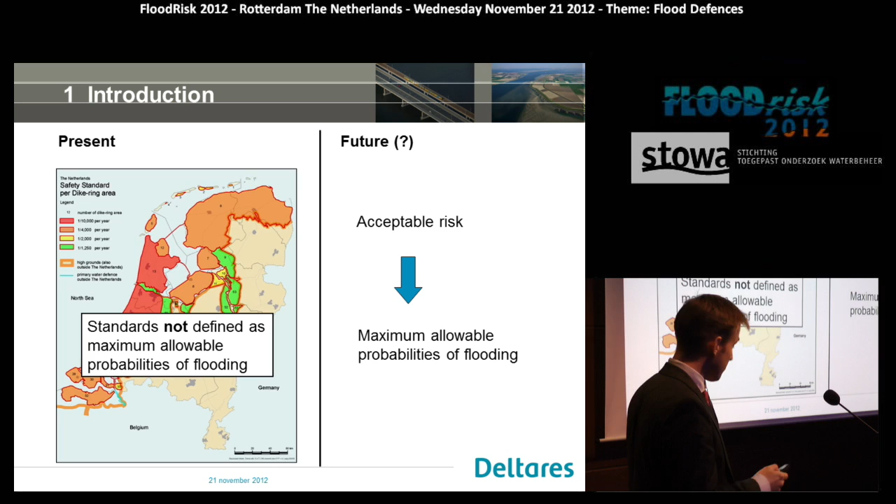Of course, if we move towards a new type of flood safety standard, we have to be able to evaluate or test our levees against these new types of safety standards. And that basically means that our current methods could no longer be used. And that's where the WTI 2017 project comes around the corner. Its objective is to make possible a statutory safety assessment, which has to be carried out every 6 years, based on maximum allowable probabilities of failure. And it says 2017 because by that time the project has to be finished.

Well, one way, of course, to evaluate whether we meet a certain maximum failure probability would be to carry out a probabilistic assessment, to calculate a failure probability. I see it moves a little, but in a probabilistic assessment, we're basically looking at the probability that load exceeds resistance. Because if the load exceeds the strength of the levee, it will fail. And for that, of course, we need probability distributions for load and strength variables.

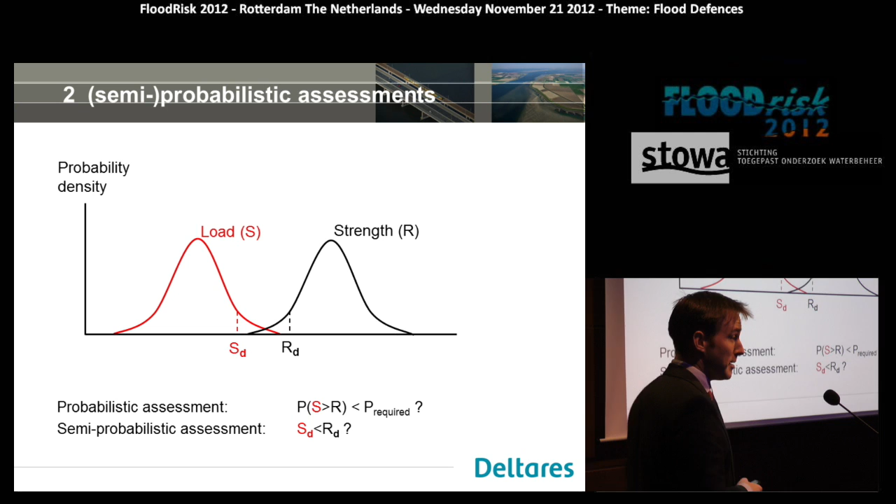Another way to assess whether a levee is sufficiently safe would be to carry out a semi-probabilistic assessment. And in a semi-probabilistic assessment, we use design values. And we're asking ourselves, is the design value of the load greater than the design value of strength? And a design value is a unique value out of an entire probability distribution. And for that reason, quite often engineers call those types of semi-probabilistic assessments deterministic assessments. Well, I think that terminology is slightly confusing because the exact same uncertainties play a role in probabilistic assessments.

Well, of course, the tricky part is how should we define such design values? And ultimately, basically, the idea is that these design values should be chosen in such a manner that if this criterion is fulfilled, the probability of failure is sufficiently low. And this procedure of deciding on design values is also called a calibration process, a calibration exercise.

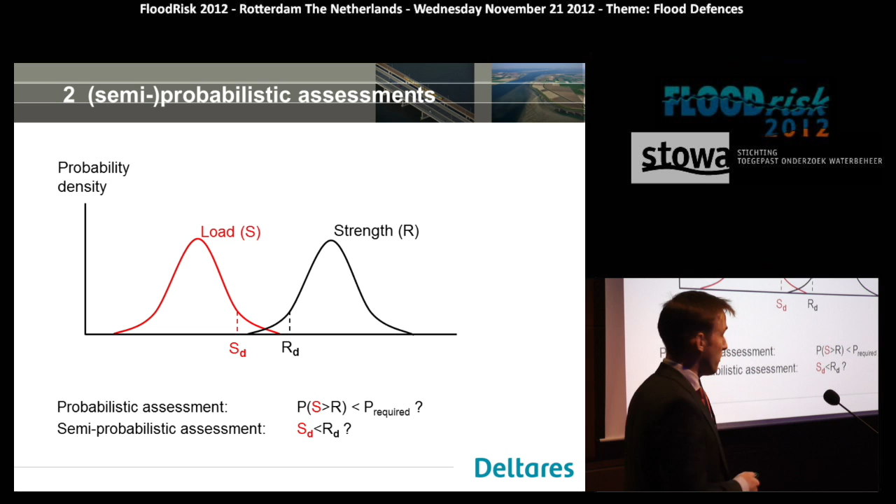And before I continue, I think it's useful to introduce you to some basic terminology. A design value is a representative value divided or multiplied with a safety factor. And a representative value is, for instance, a 5% quantile value, a 95% quantile value, or, for instance, a 1 in 10,000 year quantile value, such as a 1 in 10,000 year water level.

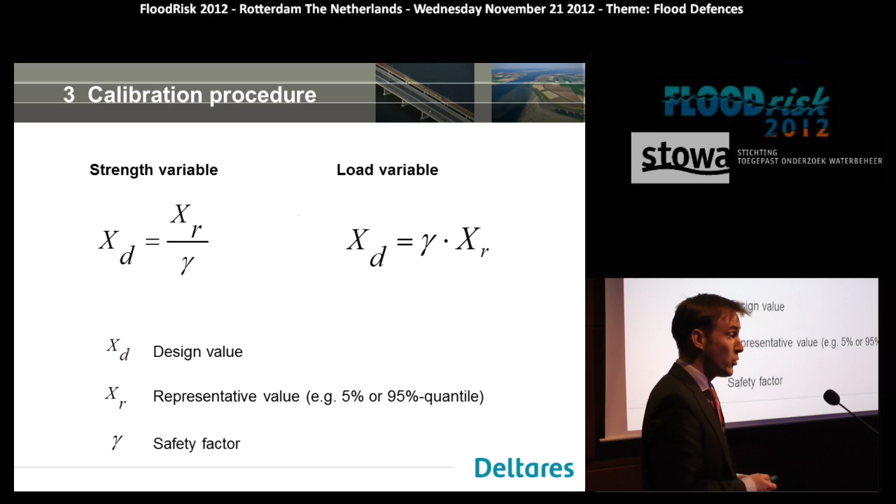Because of the role of safety factors, I will from now be mostly talking about the calibration of safety factors rather than calibrating design values.

The procedure that we developed within the context of the WTI project is first to establish a reliability requirement, then to establish a test set, which is basically a large number of levee cross-sections, then to modify the test set members according to the semi-probabilistic rule for a range of values of the safety factors that we chose to include in this rule.

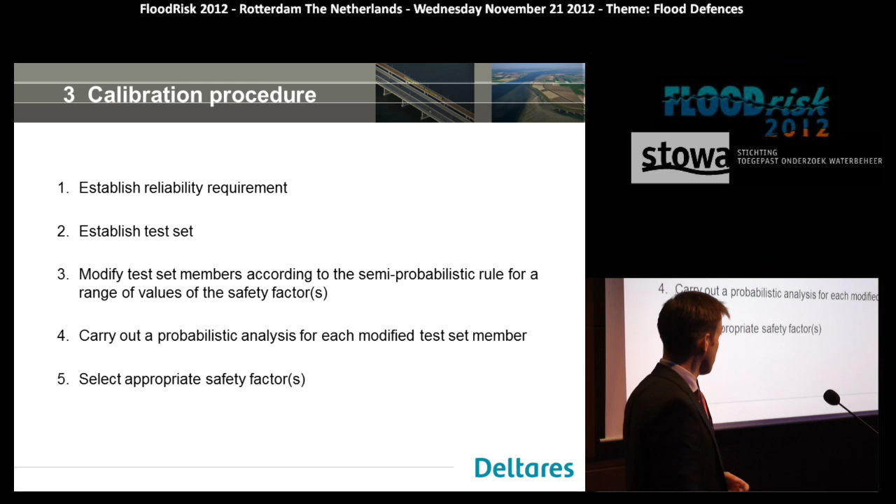So then we end up with a whole range of test set members that are modified. Then we're going to calculate a failure probability or a reliability index for each of these test set members. And then finally, we're going to select an appropriate safety factor based on the outcomes of all these calculations. And I will now explain to you what this actually means via a case study.

And our case study that I'll be presenting here concerns piping. This is a failure mechanism whereby internal erosion causes a pipe to grow underneath the levee. And progressive erosion could eventually lead to collapse of the levee.

The rule that we considered for describing the strength or the resistance of a levee against piping is the so-called Sellmeijer equation, which is used in the Netherlands in our statutory assessments. And what I would like to emphasize is that the results that I will be presenting here are the results of a preliminary calibration exercise that was mostly aimed at optimizing our methodology.

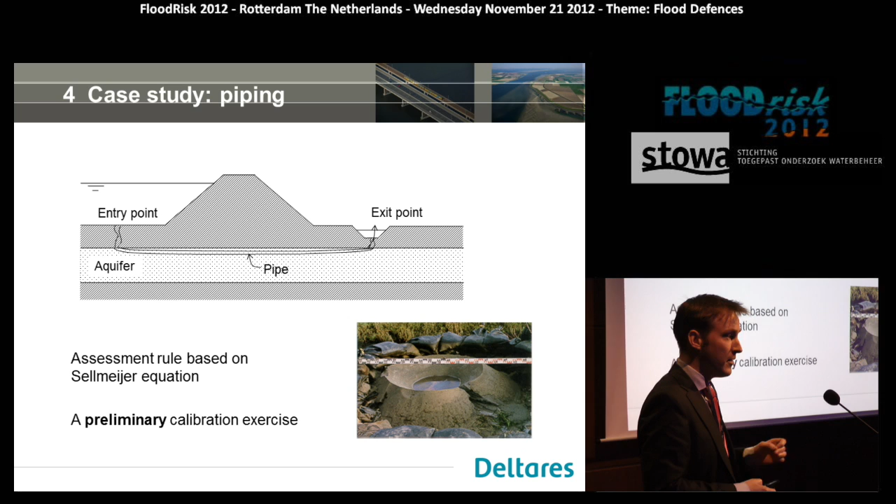Well, the first step is to establish a reliability requirement, which has to be specific for the failure mechanism under consideration. And there are many failure mechanisms that could trigger flooding, that could cause the failure of a levee. So what we do basically is distribute this maximum allowable probability of failure over the different failure mechanisms.

And in this preliminary exercise, we allocated a slot of 35% to piping. So if the maximum allowable failure probability is 1 in 10,000, then the reliability requirement for piping is 35% of 1 in 10,000.

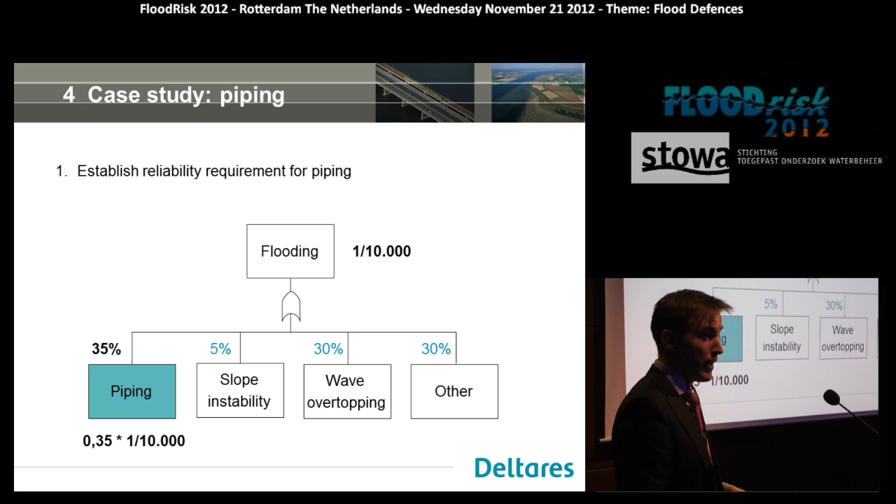A second step is to establish a test set, basically a whole bunch of cross-sections. And these were taken from the VNK2 project, which is a large-scale risk analysis for all Dutch major levee systems.

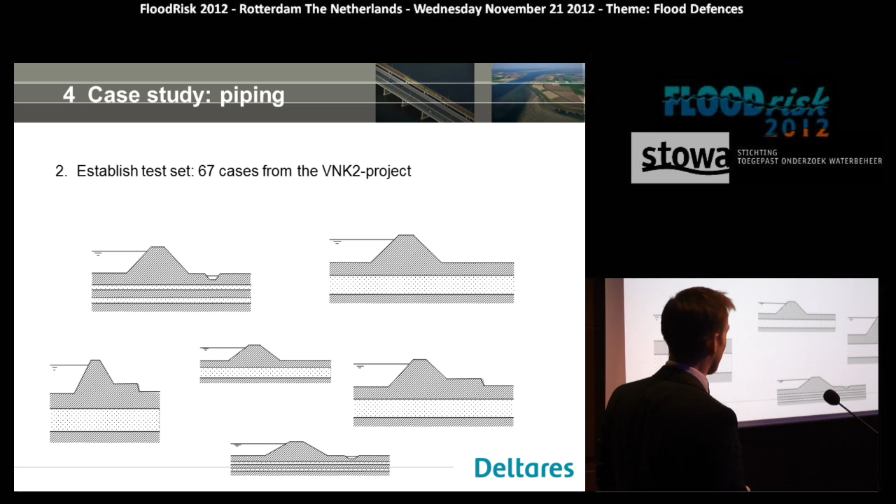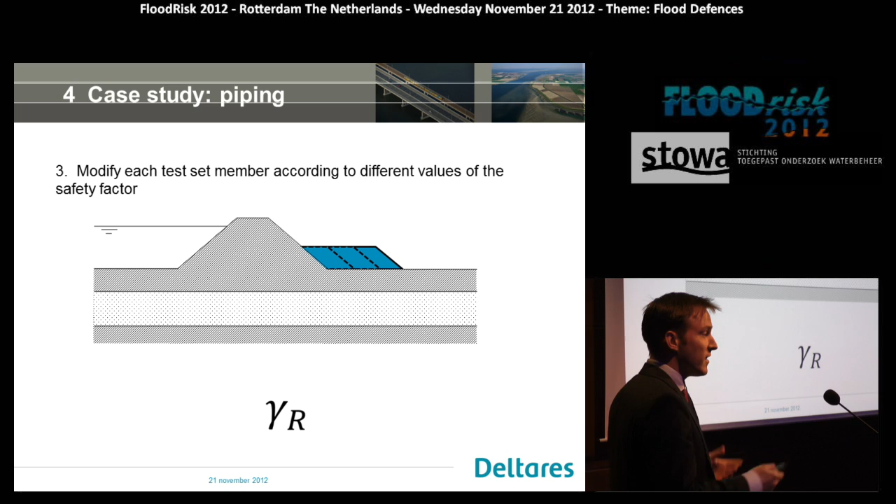A third step is to modify each test set member according to different values of the safety factor. So if we apply a higher safety factor, the levee has to be stronger. Its resistance against piping has to be greater. And this could, for instance, be done by adding a berm to increase the seepage length, the length of the seepage path. Well, the greater the safety factor, the greater this berm should be.

A fourth step is to calculate failure probabilities or reliability indices for these different test set members. And what you will see is that the higher the safety factor, the higher the reliability index will be.

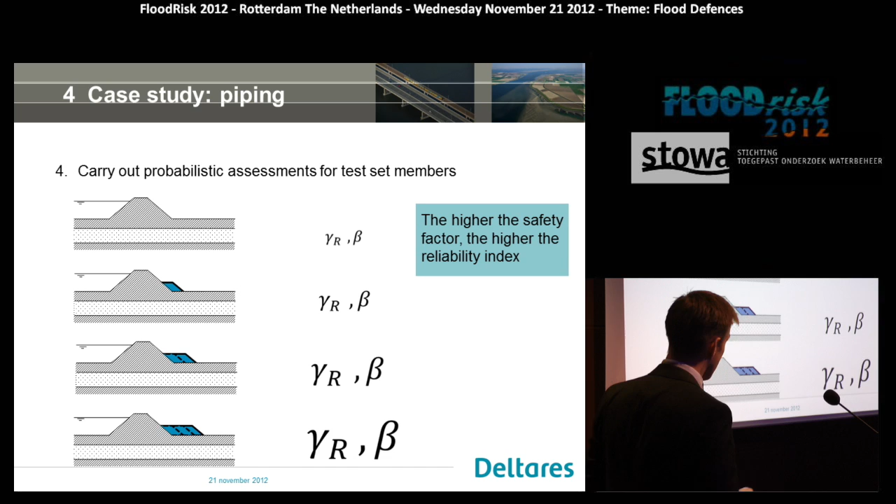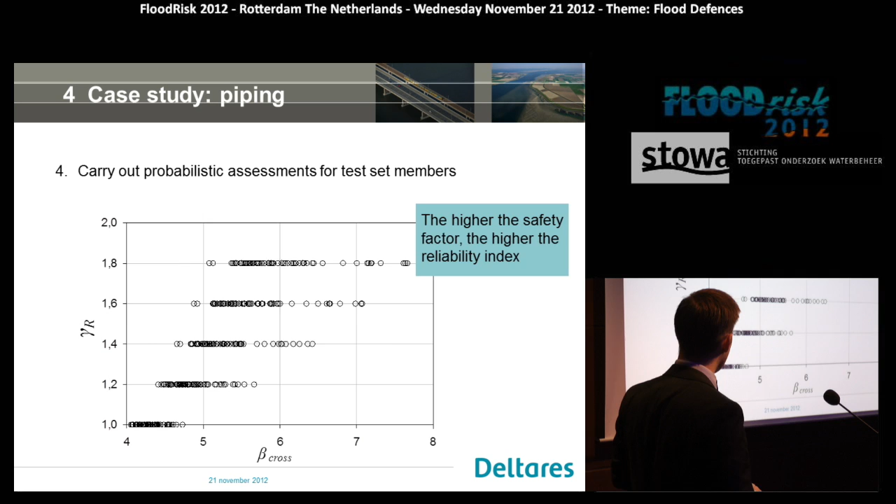Well, a fifth step is to apply a calibration criterion to select the safety factor, because it would be overly conservative if we would say that every test case has to meet a certain probability requirement, because there's always some averaging out going on.

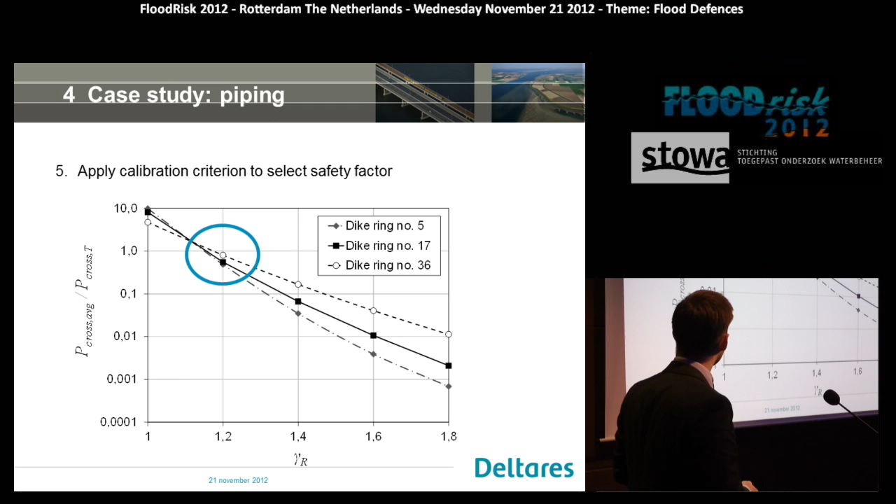So here on the vertical axis we've got the average cross-sectional failure probability divided by some target failure probability that was assigned to that value. So if this ratio is equal to 1, you could say that the safety factor is not overly conservative and is not too optimistic. So in this case, for our case study, a safety factor of around 1.2 would seem appropriate. So some concluding remarks.

This calibration procedure that we developed appears to be broadly applicable. So far we've tested it for piping, for wave overtopping, slope stability, non-closure and structural failure. And what we found is that the use of such a standard procedure not only contributes to the efficiency of calibrating design values, but it also contributes to transparency and to consistency.

And not only to the consistency between different failure mechanisms, the way we treat different failure mechanisms, but also to the consistency between failure probability calculations and semi-probabilistic assessments. And finally, what we found is that this preliminary calibration exercise provides some early insight into the likely outcomes of the new types of statutory safety assessments if we would keep using the present-day models, statistics, etc. that we have. And this can also be a major drive for further research.

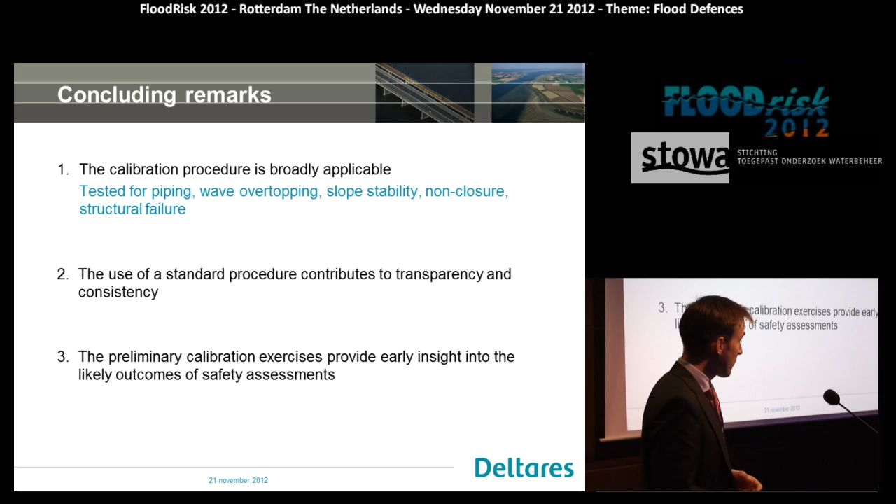Ruben, I would just like to ask a first question, if I may, because I think it's a really important one, which is that we have moved in Europe to Eurocodes, and within Eurocodes we have partial safety factors in a similar way that you've just described in your presentation. There is concern in some areas about the fact that those safety factors may lead to overly conservative designs. Do you think that your research will be able to contribute to answering those questions?

This is actually a very good point, because this is also a part of an ongoing debate in the Netherlands to make sure that there's some consistency with the Eurocode system. So we also look at what the Eurocode prescribes, what the ideas are behind those safety factors, and basically use standardized influence coefficients, for instance, if you want to derive safety factors. One of the reasons why we chose this calibration exercise is that in the new statutory assessments, we will always allow people to also make a probabilistic assessment.

So what we want to ensure is that the gap between semi-probabilistic and fully probabilistic assessments will be as small as possible to make this a very useful method to apply. And that means that sometimes we have to move away from certain factors that are used in the Eurocode system. Also, by the way, because the target reliabilities might be different.